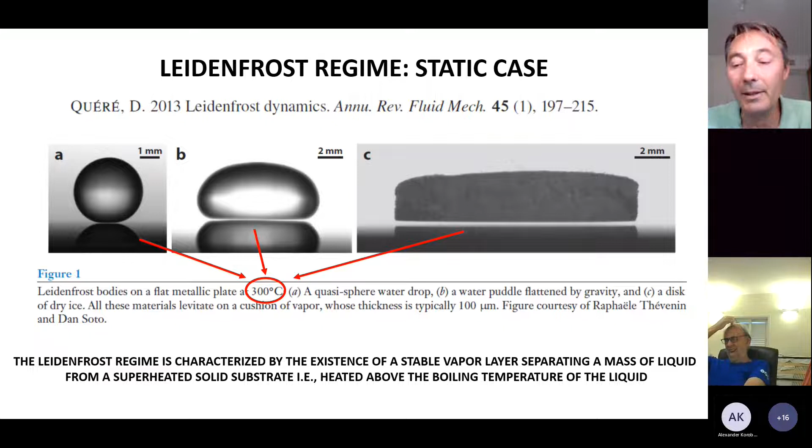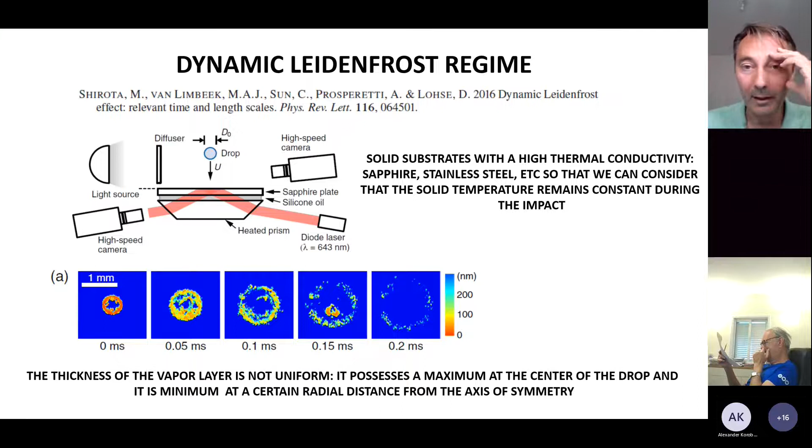And here, what we can see is from this same reference, Shirota et al., from this PRL paper, taking a millimetric ethanol drop impacting at a constant velocity, okay, what happens if we increase the solid substrate temperature. The boiling temperature of ethanol is 78 degrees. So we are in this experiment 70 degrees above the boiling temperature. The superheat is 70 degrees.

Then we can see that the liquid for this impact velocity contacts the solid. This black color indicates that the laser beam is being refracted into the liquid, so it's not being reflected and captured by the high-speed camera. But when we increase the solid temperature, what we can see is that this contact is prevented. The larger the superheat, the less liquid area contacts the solid.

And when we reach the Leidenfrost temperature, 220 degrees for this impact velocity, what we find is that the liquid never touches the wall. As you can see here, these blue colors indicate that there exists a gap of at least 80 nanometers between the liquid and the solid for all values of the radius.

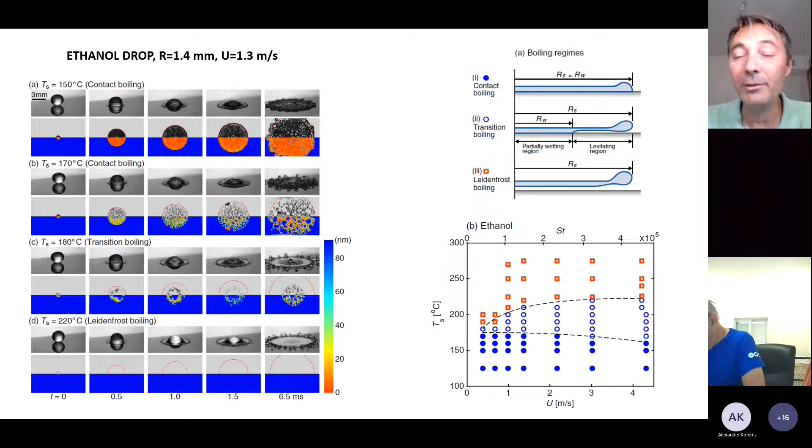Large meaning that we avoid the existence of a stable vapor layer, which, as I repeat, isolates thermally the liquid from the solid. So in this interesting paper, the authors, Shirota et al., also found that, as is common to the impact of drops over isothermal substrates, when the drop impacts a solid, this process entraps a gas bubble at the center of the drop with, you can see here, HD.

HD here is the height of this bubble at the center, at the axis of symmetry, and it scales with the Stokes number, defined as the density of the liquid, the impact velocity, the radius of the drop, divided by the viscosity of air. Okay. So it's proportional to the Stokes number to the -2/3. This is a very well-known scaling, which can be very easily deduced by just balancing the overpressure needed to decelerate the liquid with the overpressure needed to make the lubrication thin gas layer flow radially outward.

So it's very well known from these papers by Mandre and Bouwhuis, and previously by the theoretical framework presented by Frank Smith. This is very well known for decades, and this bubble is a very slender bubble, because the characteristic length, the radial extension, is the square root of HD times R.

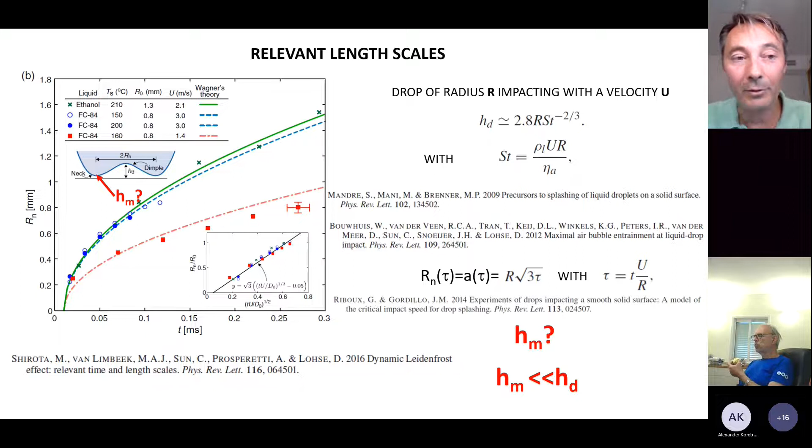But now our purpose will be to scale HM, as we already know HD, which is this thickness. What's the thickness HM, with the purpose of determining the minimum substrate temperature for which there exists a gap between the solid and the liquid.

Now we turn to another very interesting paper, also by the group of Detlef Lohse. In this paper published a year ago by Chantelot and Lohse, they report both HD and HM, the minimum thickness at the square root of 3 tau, for different values of the impact velocity. They focus on the case of ethanol, and we will also focus on ethanol, a liquid for which we have more experimental information to describe this dynamic Leidenfrost regime.

And what they found is that indeed the thickness of the gas bubble entrapped at the center of the drop scales as 2.8 times the radius of the drop times Stokes to the minus 2/3. As you can see here, HD varies depending on the impact velocity from 5 microns to 1 micron. They also measure, as a function of the impact velocity, the minimum thickness at the square root of 3 tau, and these distances vary from 1 micron to 200 nanometers.

And they cannot, and I will turn to this question later, measure smaller values of HM below 200 nanometers. They also find that the dependence of HM on the impact velocity is also of the type Stokes to the minus alpha, with alpha larger than 2/3. As you can see here, this slope is clearly larger than this. And our purpose here will be to understand these experiments reported recently by Chantelot and Lohse.

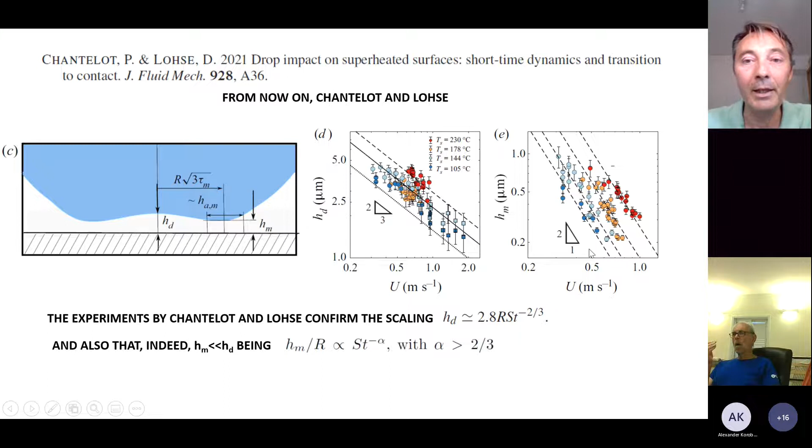They report experiments for exactly the same drop, impact velocity and temperature, and sometimes the contact is produced when the minimum thickness of the vapor film is 200 nanometers, other times 400 nanometers, because it depends on the presence of solid particles on either the liquid or the solid. Whenever the vapor layer thickness becomes of the order of these asperities, the contact is produced, destabilizing the vapor layer and breaking the Leidenfrost regime.

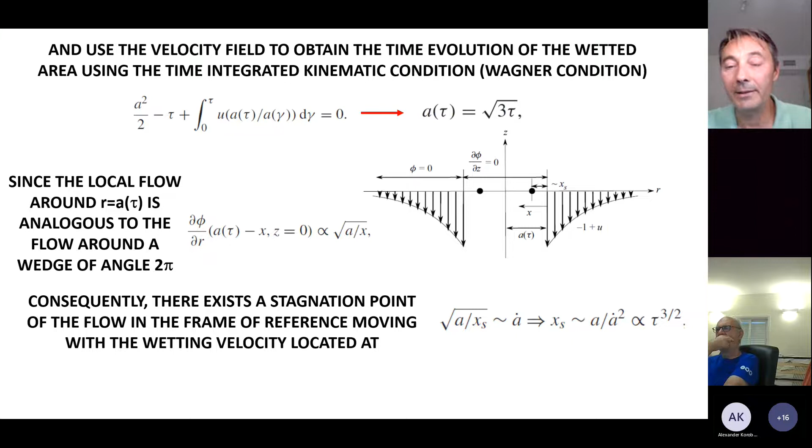So in this region of characteristic width xs, we will have very large pressure variations, which indicate that the pressure gradient in this small region is huge, and this is the main idea behind the scaling that I will present next. But first, let's summarize: in the frame of reference moving with this velocity, which varies as tau to the minus 1/2, there exists a region of characteristic width xs, proportional to tau to the 3/2, see also this paper by Scolan and Korobkin, where the pressure changes from its maximum value.

This is just Euler-Bernoulli because the flow is quasi-steady, and you can see here how pressures diverge as tau to the minus 1, velocities as tau to the minus 1/2, and therefore the characteristic pressure gradient is delta P divided by the width where this pressure variation takes place. So it varies as tau to the minus 5/2. So the pressure gradients are really huge and would tend to infinity, but of course neither velocities nor pressure gradients tend to infinity, because there exists a minimum value of tau.

This value of tau is a characteristic time at which the bubble is entrapped, because the liquid does not immediately touch the wall; as we described previously, a bubble is entrapped at the center of the drop. So which is the minimum value of tau where this description is valid? If we want to find the most demanding conditions for which a stable vapor layer exists, it is when this pressure gradient, this pressure and these velocities are the largest, and those occur exactly when the bubble entrapped at the center of the drop is formed, at a time scale tau m, which is nothing but the thickness of the entrapped bubble divided by the impact velocity.

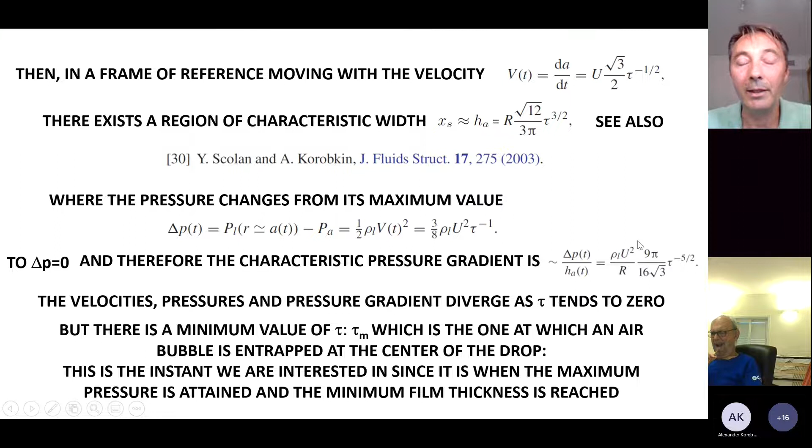And so this provides us immediately with the scaling a constant times Stokes to the minus 2/3, using our result of HD, with this constant 12.4 very kindly provided to us by Chantelot and Lohse. So introducing this value of tau m into these expressions, we find that the maximum tangential velocity during the impact process varies as Stokes to the 1/3. The maximum overpressure varies as Stokes to the 2/3, and the width of the region where pressure variations take place varies as Stokes to the -1.

The values of the Stokes number are of the order of 10 to the 5 or 10 to the 6. So you can see here why this width is of the order of 100 nanometers. It's really, really tiny.

And these overpressures can be of the order of 1 atmosphere or more, so 10 to the 5 pascals, due to this very large factor, for impact velocities of the order of 1 meter per second. And now that we have described this, then we move to the

ideas of lubrication. So we have a region where we have a very strong pressure gradient, and in order for the liquid to not touch the wall, what we need is that there exists a finite vapor layer with a finite thickness that separates the liquid from the wall and avoids the contact between the liquid and the solid.

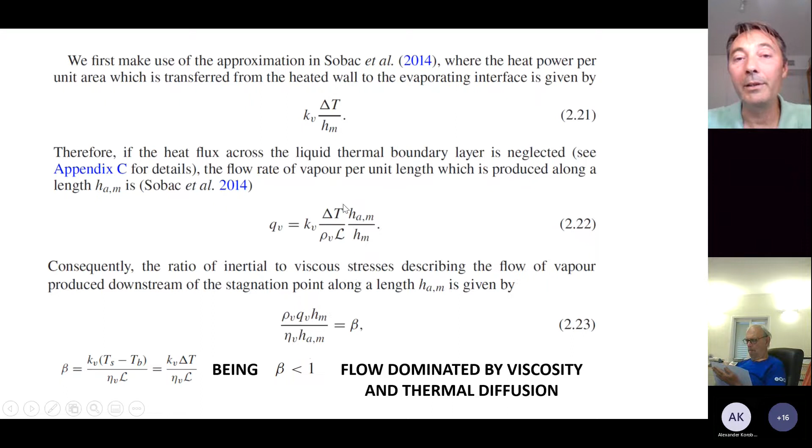Now all we need to do is to substitute the value of Q, the flow rate per unit length of vapor, and then solve this quartic equation for HM, which is a quadratic equation for this variable Y, defined like this. And then we simply solve this quadratic equation and find the solution for HM, as you can see here, where C tau is a number provided to us by Chantelot and Lohse, and all these material properties and the Stokes number.

As you can see, we have a closed equation for HM, and we compare the experimental data of Chantelot and Lohse with our prediction, and we have no fitting constants here. Between the experimental data of Chantelot and Lohse and our prediction, there exist maximum deviations of the order of 30%.

And let me comment to you how we did this calculation. We did not fit any constant, and we used real material properties of the fluids. We evaluated the material properties at the mean temperature between the solid temperature and the boiling temperature of the liquid, which is the temperature of the evaporating interface. And we use real material properties of air and ethanol

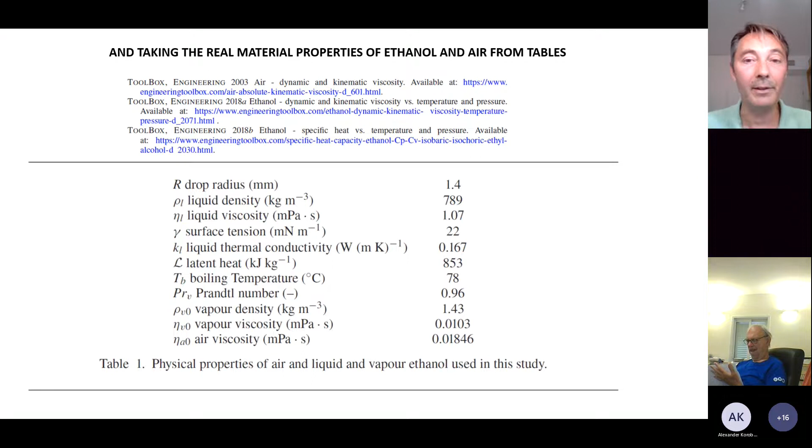You have to evaluate the vapor density, taking into account that the vapor is produced in this region where pressures are very large, using the ideal gas law, and evaluating the density of the vapor produced at the mean pressure of this region where the pressures are the highest, the stagnation point pressures.

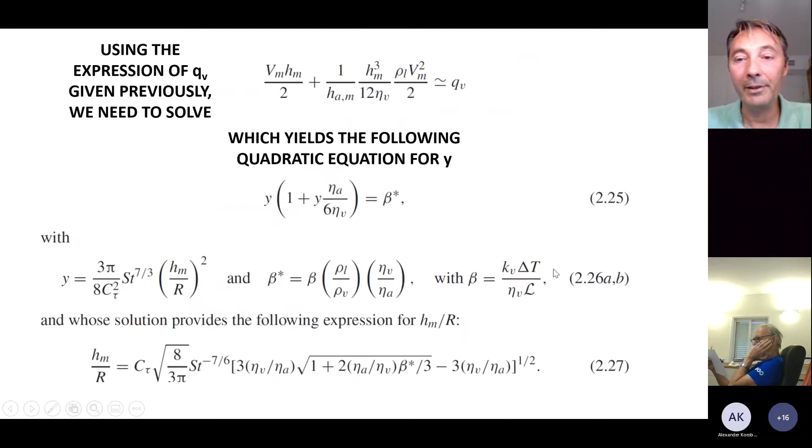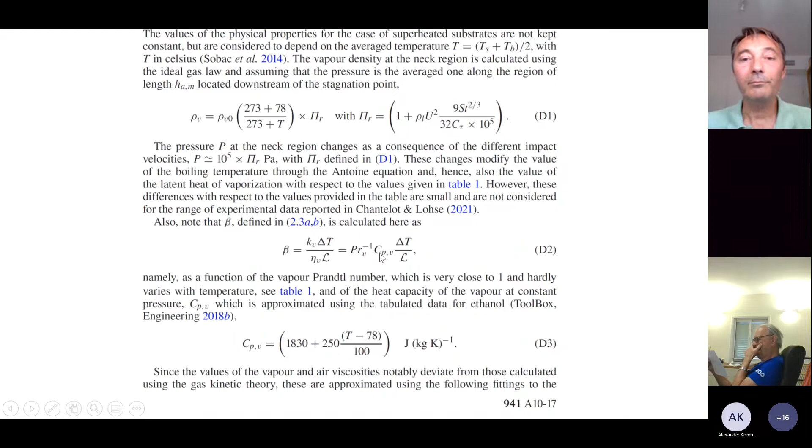And in order to calculate this beta, which appears here, here you have the viscosity of the vapor, but of course it's better to make appear the Prandtl number, which does not depend on temperature, and then the heat capacity of the vapor at constant pressure, which we can express in this way, taking the tabulated tables of

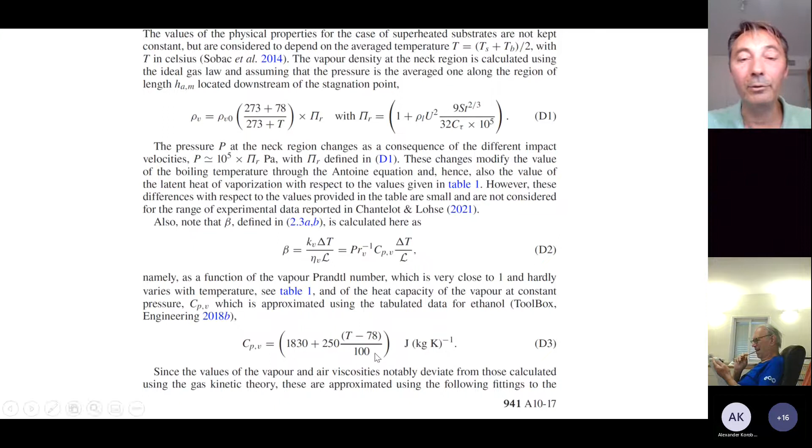ethanol. And of course, you also need to take into account the dependence of the viscosity of the vapor with temperature, and for real fluids you really cannot resort to the kinetic theory of gases, but you really need to take the tabulated data, which can be easily accessed through the many tables existing in the literature, also by just Googling it.

And as another check of our prediction, as I commented to you previously, Chantelot and Lohse provided us with the conditions for which we had short-time contact. This short-time contact depends very much on the presence of impurities or asperities on the surfaces of either the drop or the solid. And let me remind you that what Chantelot and Lohse told us is that the sizes of these irregularities are in between 250 and 400 nanometers.

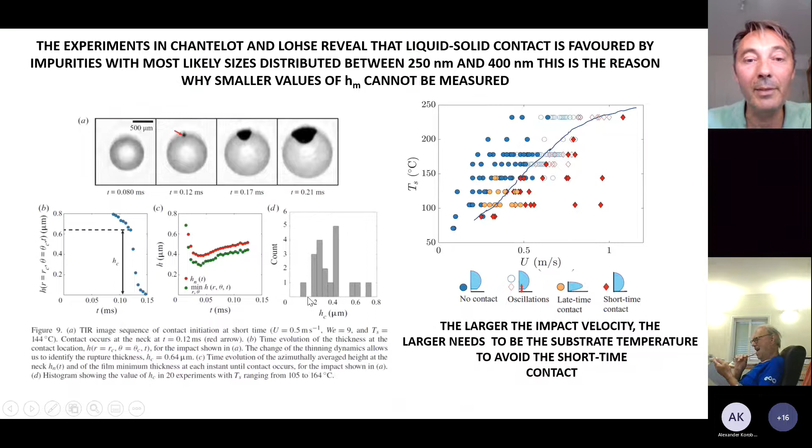And then what we said is, okay, we are going to make use of our equation, but now Y is known. The thickness of the vapor layer, if you want to determine when the contact is produced, is equal to the thickness of the impurity, let's say 250, 400 nanometers, and then we find directly beta, and finding beta means finding the substrate temperature for which we would have the first contact between the liquid and the solid.

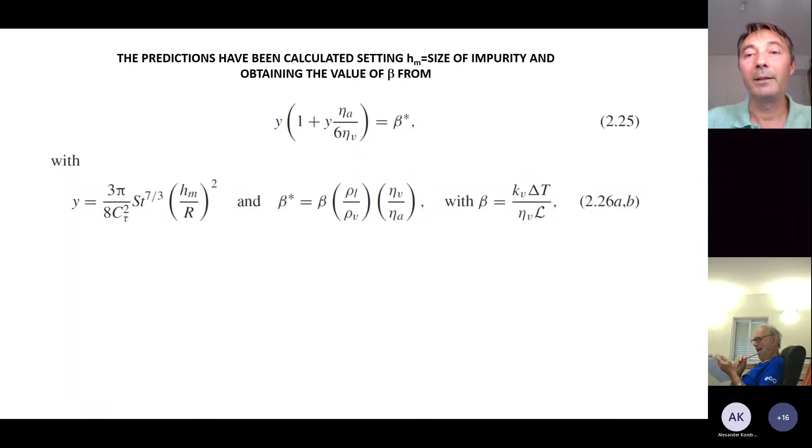And what we find is that if we make use of these values of the asperities, dust particles that could be present in experiments, between 250 nanometers and 360 nanometers, both the experiments by Chantelot and Lohse and also the experimental data by this group who used another technique, fast X-ray imaging, which correspond to these two black dots, are in reasonable agreement with our predictions, depending on the size of the impurity.

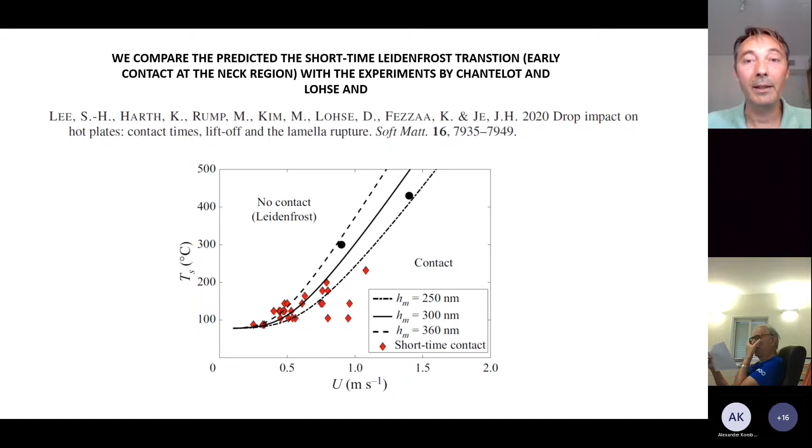We cannot exactly predict because it depends on the contamination present at each experiment. But as you can see, for these usual values found in experiments, the agreement between our predictions and the experimental data is good. But now, you say this is a way to predict the Leidenfrost temperature, which is the minimum temperature for which we would avoid the contact between the solid and the liquid.

But what we find is that this paper by Shirota et al., which is the one which motivated our study, predicts Leidenfrost temperatures which are smaller. You can see here, 2 meters per second, 220 degrees, the solid temperature that you would need for the liquid not to contact the solid at this very thin region, where the distance between the gas and the solid, this HM, is really small. It's really small.

So the conclusion we reached is that the spatial resolution in the experiments by Shirota is not as good as in these other experiments, because if you really want to avoid the contact at every radial position from r equals 0 to r equals the square root of 3 tau, including this very thin nanometric region of width xs, which depends as Stokes minus 1, if you want to do that, then the result of the substrate temperature is this.

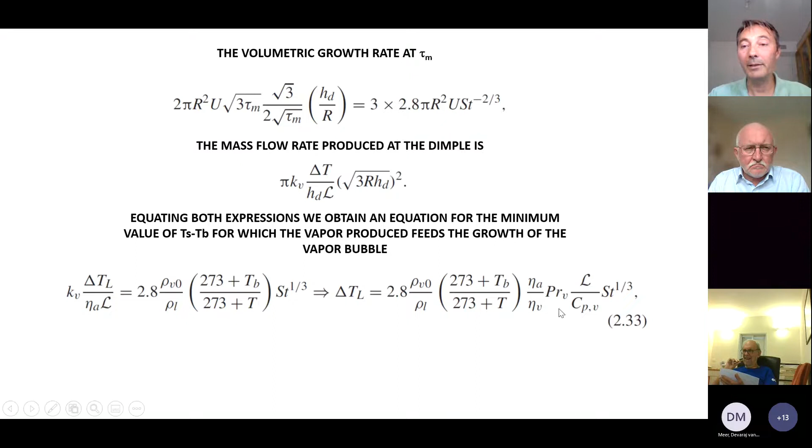And this provides us with the minimum value of the substrate temperature for which we produce enough vapor so that we can feed the growth of this growing volume of vapor beneath the drop. This provides us with this equation, and this is our prediction, where we did not fit any constant, and here we have maximum errors of the order of 15% for the larger impact velocities. We need to take into account that we use real material properties evaluated at the mean temperature. Of course, things are a bit different from this, but this is an approximation.

And also, we have to take into account that at the center of this vapor bubble we have air and ethanol, and so we really don't know the exact composition of this mixture at the center of the bubble. But in spite of these approximations, we think that our prediction could be used for applications where you need at least an estimation of what the Leidenfrost temperature will be as a function of the impact velocity. I thank you very much for your attention.

But let me finally say that for the case in which we do not have an isothermal substrate, we make use of the same ideas as before, and then we solve this equation.

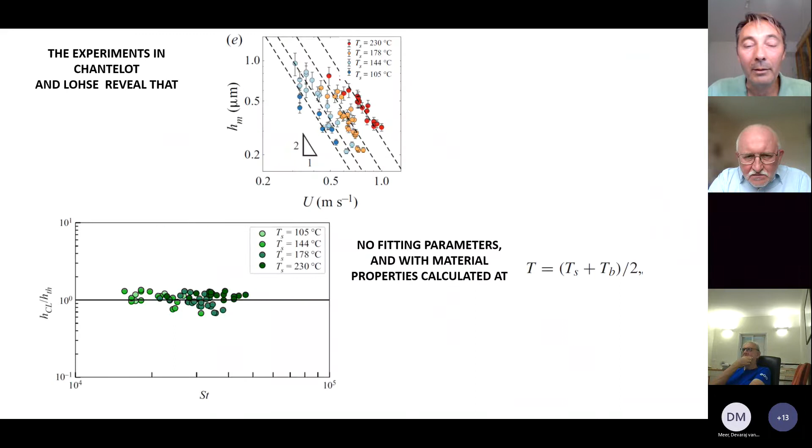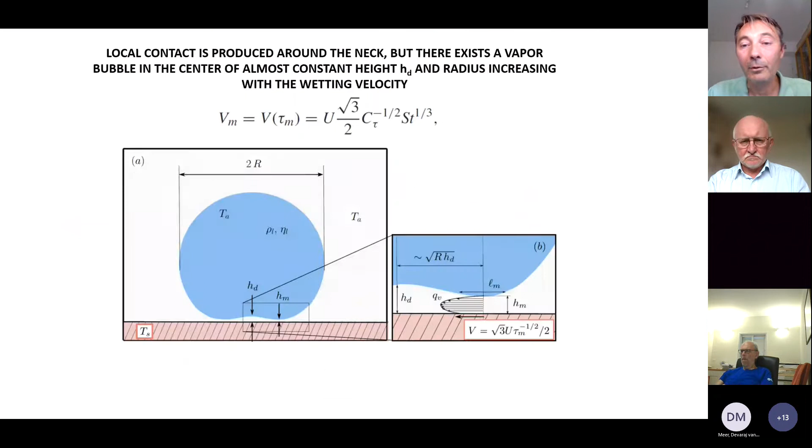But since in the isothermal case, let's say an ethanol drop on a not superheated substrate, this QV, instead of the vapor produced, is the flow rate of air in the moving frame of reference coming into this thin region, which would be VM HM. And so just solving the same type of equation, a quadratic equation, we also have a prediction for the minimum thickness of the air layer on isothermal substrates, without any fitting constants.

So what we have is that the comparison with published data is good.

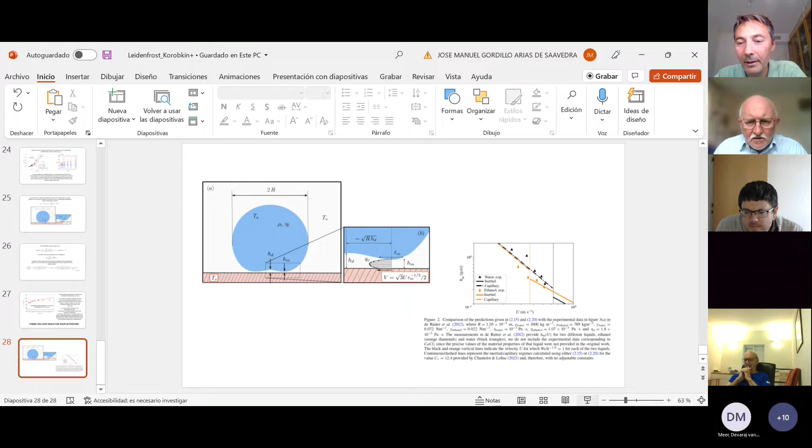This black line corresponds to what Peter was mentioning. When the speed is not that large, the overpressure at the stagnation point is compensated by capillary pressure. In the paper, the length scale is not HAM, Stokes to the minus one, but the characteristic width where pressure variations take place is exactly the one in which the capillary pressure, sigma, the surface tension, times the second derivative of the interface, HM divided by an unknown length LM squared, is of the order of delta PM, the overpressure caused by the stagnation point. By balancing the overpressure with the capillary pressure you find this new LM, which is not the width deduced by Wagner's theory.

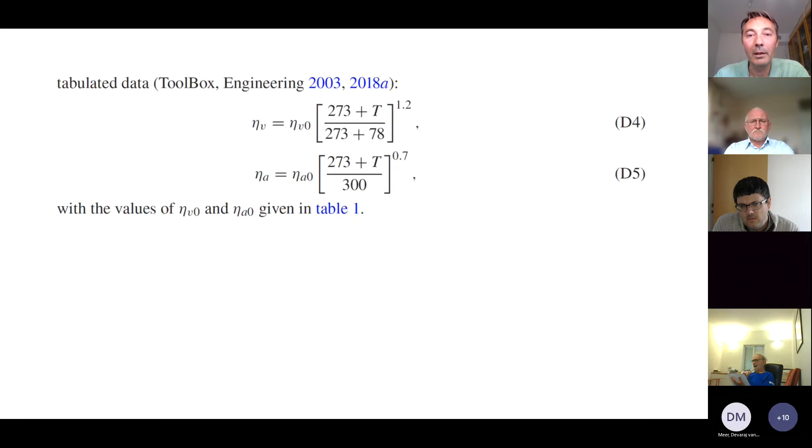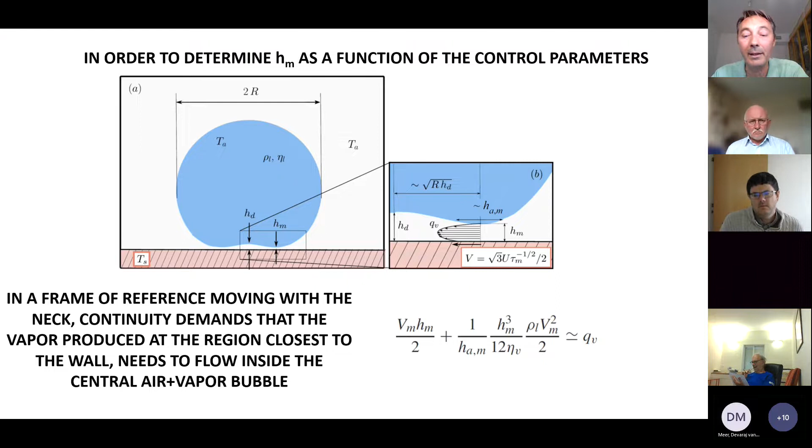Have I answered the question? I think so, yeah. But I just want to ask, does that put it to a static Leidenfrost temperature then, rather than a dynamic Leidenfrost temperature? Because there is no impact velocity ultimately.

No. So when the velocity tends to zero, but Peter, this is important: when I started reading about this around a year ago, you see the velocities here, 0.2 meters per second, and then you wonder how this experiment is done, because 0.2 meters per second is difficult to control. So if you wanted to do it static, I think it's difficult to do it with less than 0.2 meters per second.

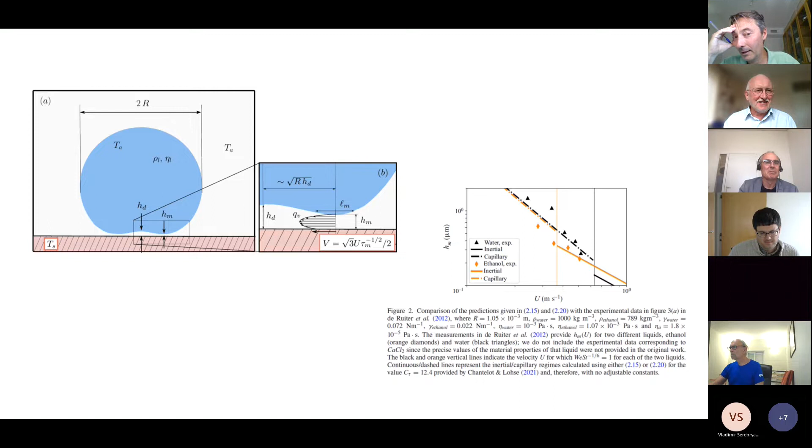Any other questions? I have a list of questions I can ask. So first of all, is the velocity of the droplet constant in your calculations? If you mean if we have varied, well, the Stokes number is varied, but no. Did you account for the speed of the droplet getting smaller and smaller, and finally approaching the static position? No.

So we just take the approach that at infinity the velocity is u, fixed in time. Okay. So this means that potentially, if you start from impact, finally it will be a static position of the droplet with a very thin layer between the droplet and the substrate. But you actually consider the initial stage, right? Yeah.

Let's say the short time contact, because we think these are the most difficult conditions, since that's when the pressure gradients are the largest, and so the most difficult conditions to avoid contact between the liquid and the solid. So from the beginning we understood these were the most difficult conditions, and we decided to work on the conditions where the pressure gradients are the largest. Okay, understand. Devaraj, you have a comment.

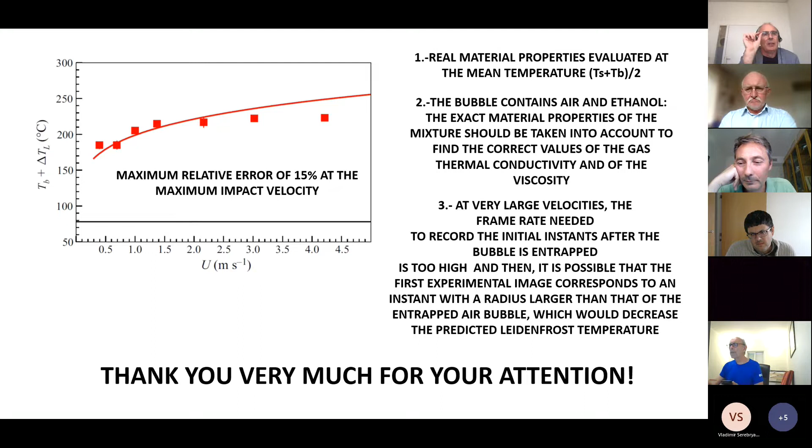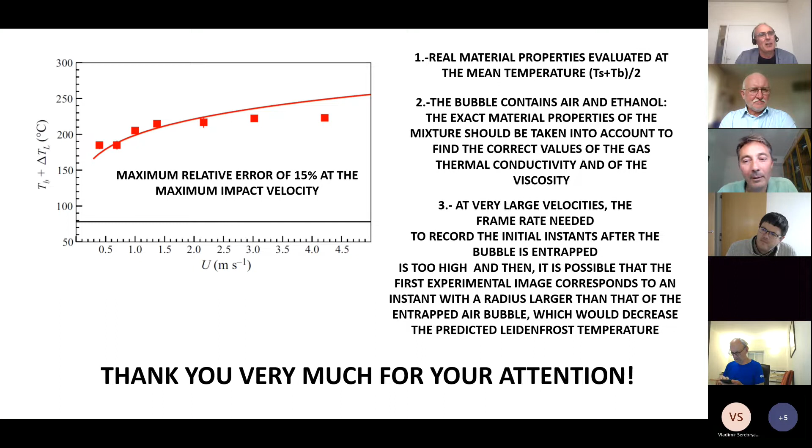Yes, well, a question actually. There's one thing I didn't completely understand. You said you would expect in the Shirota experiments that the Leidenfrost temperature would be much higher, but they could not resolve, if I understood correctly, the minimum. Is that just because in the TIR experiments the resolution wasn't large enough to really see that? This is the only explanation I have, because both experiments are done exactly with the same experimental technique.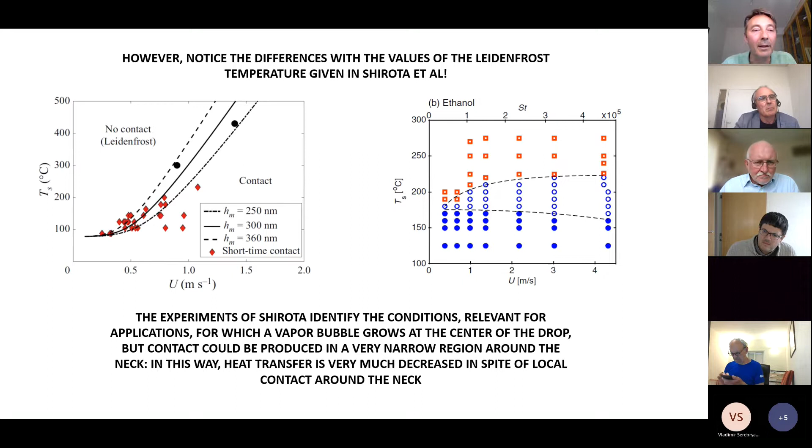And you have these experiments with two different experimental techniques, fast X-ray and TIR. What we would expect for 1.5 meters per second is temperatures of the order of 500 degrees, and in these others, 200 degrees. Because both experiments are done with the same material, the only explanation I could find is that the ones on the left, by Chantelot and Lohse and by Lee et al., really looked at the finer details of the flow in the region where pressures are larger, and took lots of care in describing this region.

Here, maybe the resolution was not that large, and they simply saw a larger area. From an experimental point of view and from applications, I think the data on the right is the most important, because it's when you have enough heat flux to produce enough vapor to fill in this growing volume, which is exactly what you commented in your talk two or three weeks ago. You need to fill in this growing area, and it really doesn't matter if you have local contact there. Yes, I get it. Thank you. You are very welcome, Devaraj.

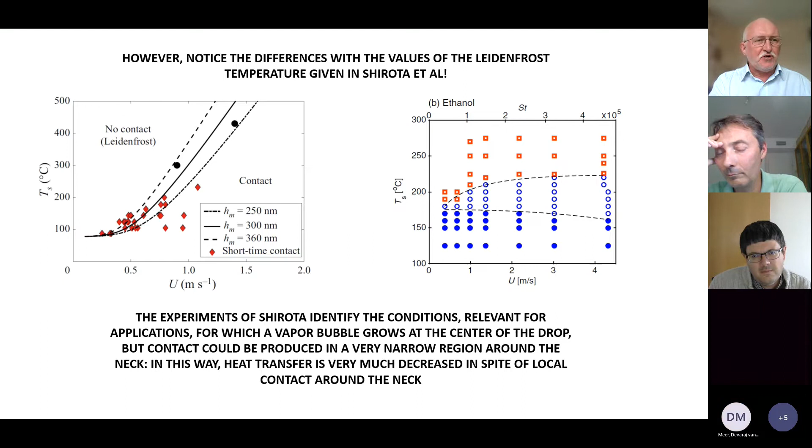Yeah, what you are saying is the hydrodynamic part of the problem. So in terms of hydrodynamics, in terms of the flow, I do understand what change should be introduced. However, I'm more concerned, maybe because I'm not so familiar with it, with the thermodynamical part. Because if the droplet comes to a new part of the substrate, which is still at another temperature, the temperature under the droplet and the temperature of the substrate outside the droplet are different, because there is evaporation, right? So how to account for that?

Possibly the thermodynamics is not important. Because I really do not see, for an observer moving with the tangential velocity of the drop, unless the tangential velocity of the drop is huge. From a thermodynamic point of view, the internal energy only enters into the equation, I mean the kinetic energy of the relative flow never enters, and so I don't know how. So the important thing, I think, is hydrodynamic, and I don't think it's much more difficult than this. Describing it in this relative frame of reference, I think it's mostly the same. Maybe I'm wrong, but yeah. Okay, I see.

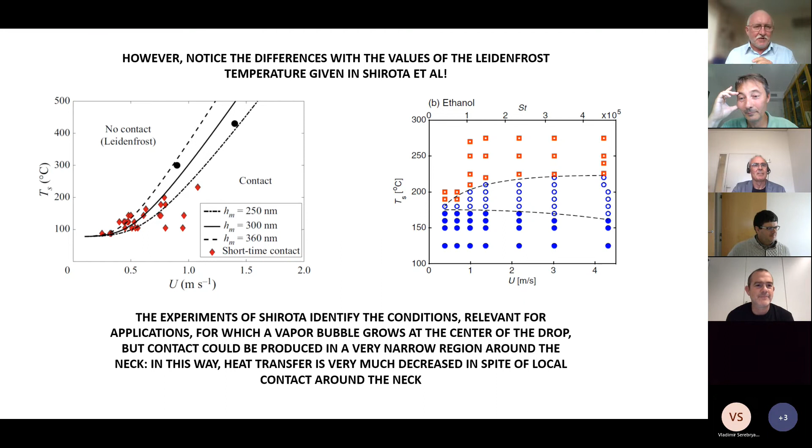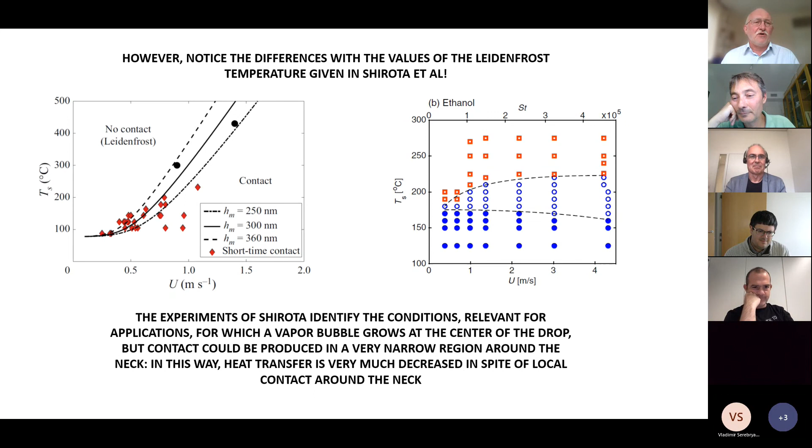I found that at least I should watch this seminar again, because there are some ideas which are quite deep and they resonate with the talk by Devaraj. So the point is, there are many similarities indeed because of the cutoff time. It's the same as Devaraj said; we are very close friends, and it seems that we think similarly, but from different directions. You are not going the same way, so that is good, because you think alike but are complementary to each other. If you think in the same way, it would be too boring. Exactly. In some sense you are attacking the same problem. There are very interesting ideas I got from Devaraj and from you. So very good.